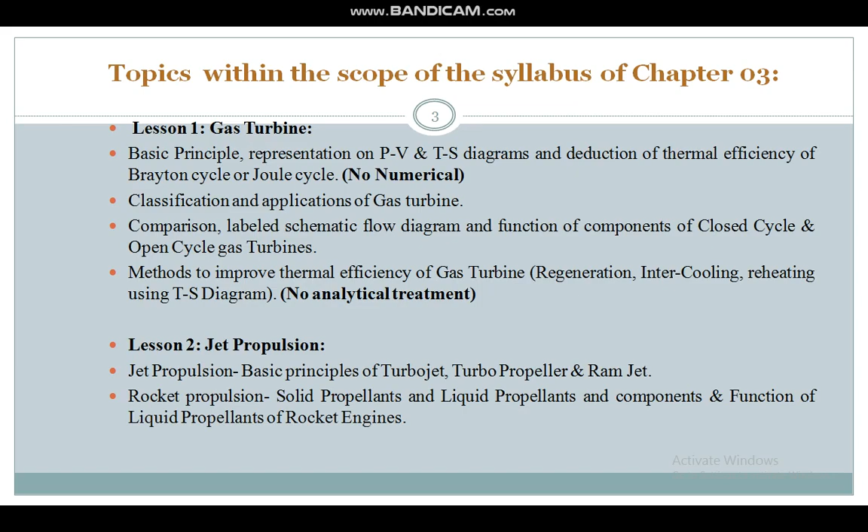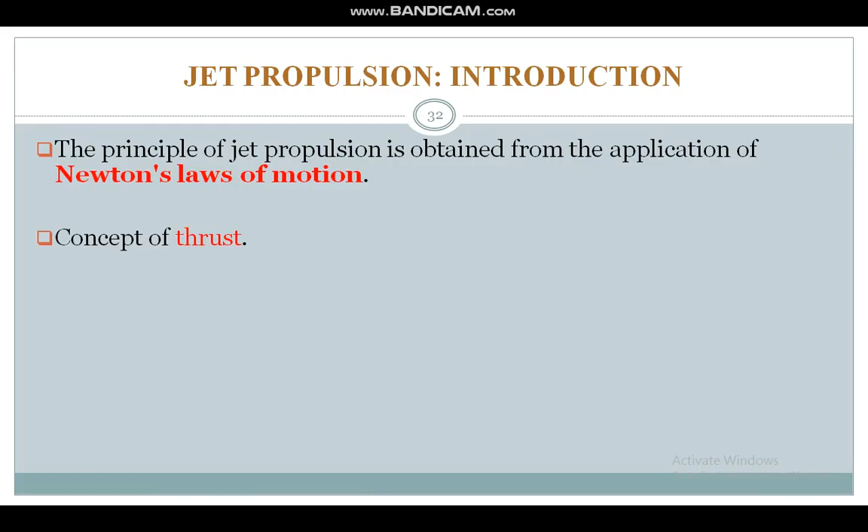In jet propulsion, the principle is obtained from the application of Newton's law of motion, the concept of thrust. When a fluid is accelerated, a force is applied on it. From Newton's law of motion, we know that an equal and opposite force is applied because of Newton's third law of reaction. This opposing force is a reaction force, and that is the thrust.

For jet propulsion, any type of fluid can be used, but mainly two types are useful. The first is highly compressed air admixed with liquid droplets, and the second is to use oxygen separately as an oxidizer to be mixed with the fuel and produce a jet of gas. This is mainly used in rocket propulsion, which we will discuss later.

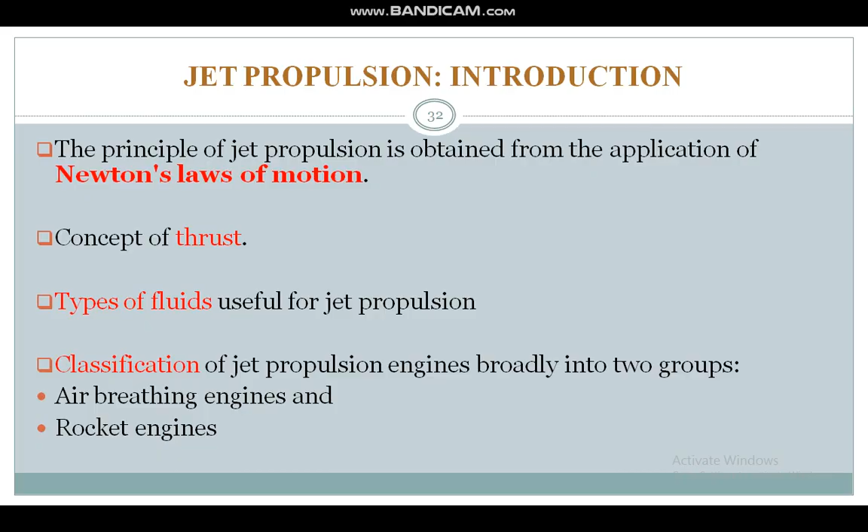Based on the type of fluids, jet propulsion engines can be classified into two groups: air breathing engines, where the oxygen is taken from the air, and rocket engines, where the oxygen is carried within the system. In rockets, the oxidizer, liquid oxygen, is carried.

Air breathing engines can further be classified into reciprocating propeller engines, and gas turbine engines.

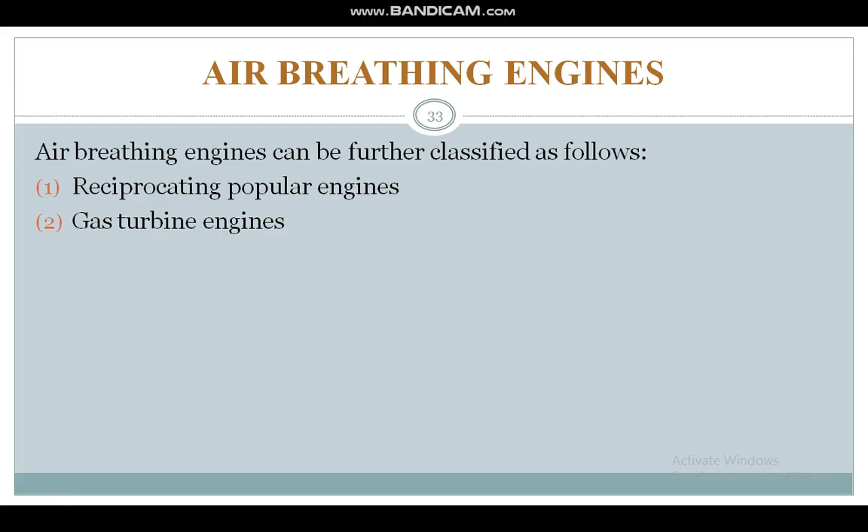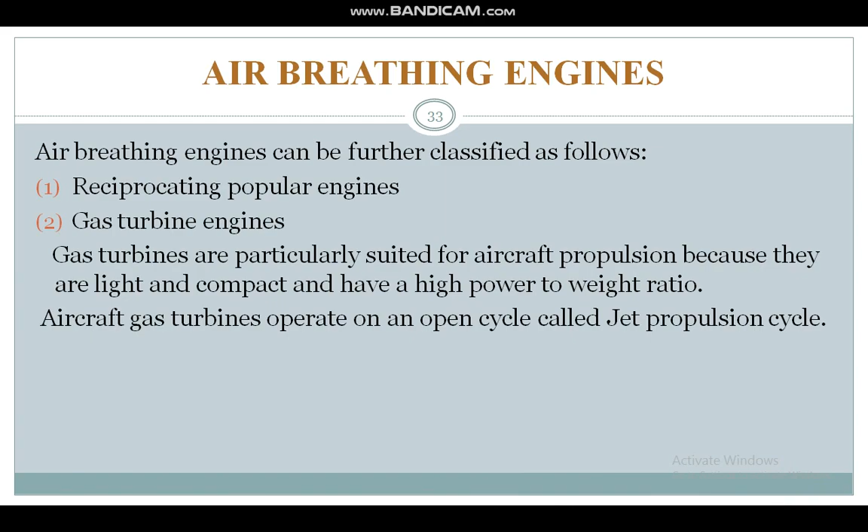Gas turbines are particularly suited for aircraft propulsion because they are light, compact, and have a high power to weight ratio. Aircraft gas turbines operate on an open cycle known as the jet propulsion cycle, and gas turbine engines can be classified into mainly five types: ramjet, pulse jet, turbojet, turboprop, and turbofan.

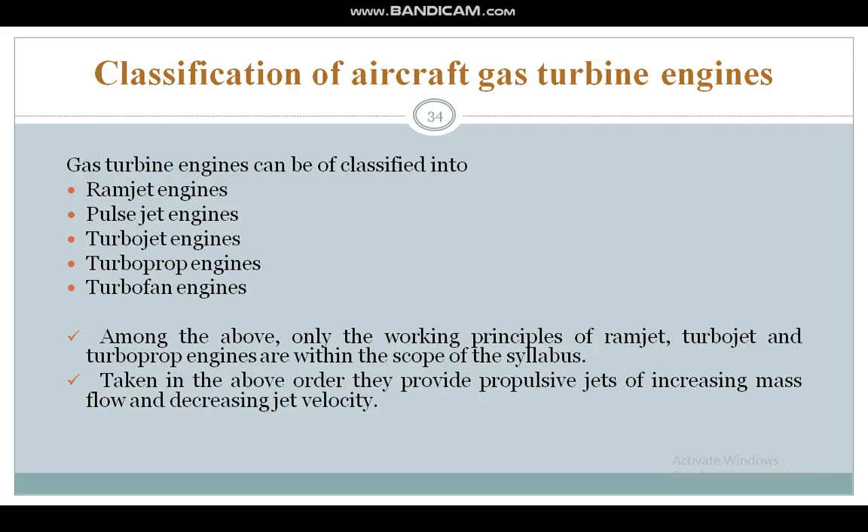In your syllabus we will discuss shortly about ramjet, turbojet, and turboprop engines, covering only their working principles, taken in that order. They provide propulsive jets of increasing mass flow and decreasing jet velocity - for ramjet we get the maximum jet velocity, and for turboprop we get the minimum jet velocity.

Turboprop engines are suitable for lower cruising speed at low altitude, and ramjet can be used for the highest cruising speed at the highest altitude.

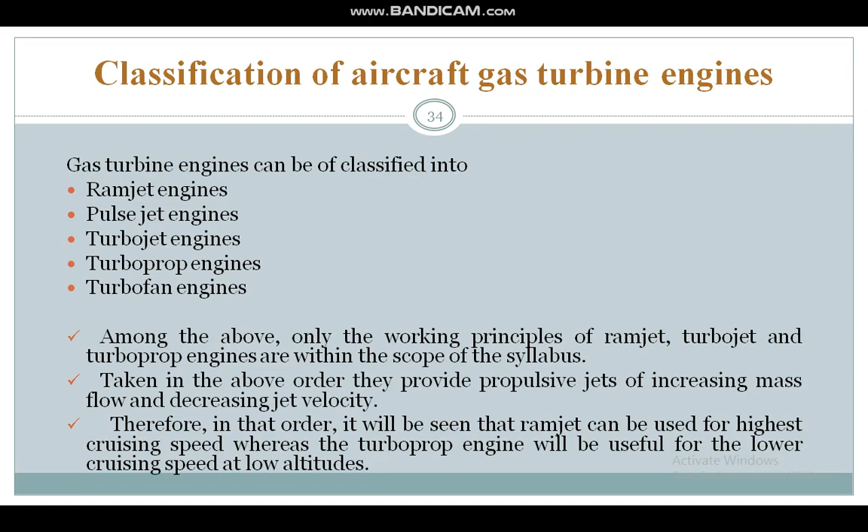Now let us start about the turbojet engine. This is the Heinkel He 178. It was the first aircraft in the world to be flown on a turbojet engine, in the year 1939. It was developed in Germany during World War II.

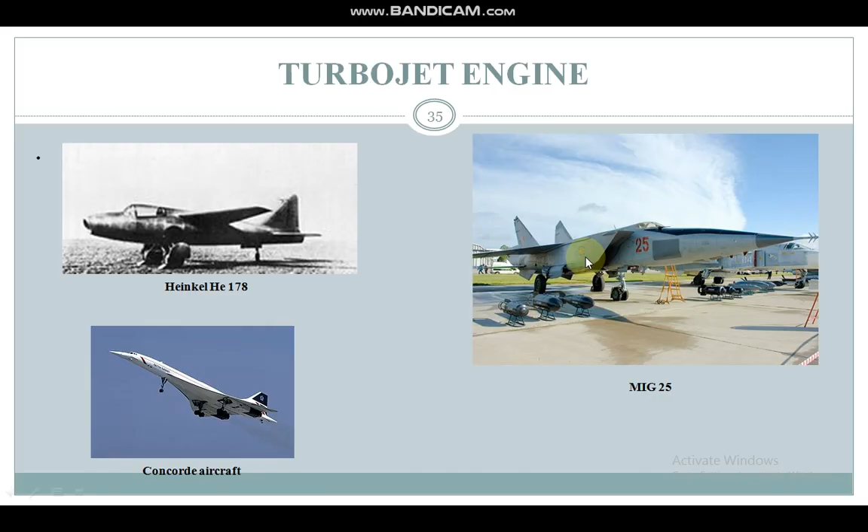Another two famous aircraft which flew on the turbojet engine were the Concorde, and the Soviet designed MiG-25, which was also used extensively in the Indian Air Force and retired a few years back. Now let us start with the turbojet engine. This is the basic components of the turbojet engine, and the TS diagram is shown here.

In the turbojet engine, the high velocity air first flows through a diffuser where it is decelerated, increasing its pressure - this is the diffuser part. Air is then compressed in the compressor, mixed with fuel in the combustion chamber where the mixture is burnt at constant pressure - there is a burner section - and then the high pressure, high temperature combustion gas partially expands in the turbine, producing enough power to drive the compressor and any auxiliary equipment.

This is the turbine part, and the exhaust gas drives the turbine. On the same shaft of the turbine the compressor is mounted, so when the turbine rotates, it also drives the compressor. So the driving power required for the compressor is taken from the turbine itself, right?

Finally, the gas expands in the nozzle to the ambient pressure and leaves the aircraft at high velocity. This is the nozzle part. So in the ideal case, the turbine work is assumed to be equal to the compressor work. The processes in the diffuser, compressor, turbine and nozzle are assumed to be reversible and adiabatic.

This is the turbine expansion line, 4 to 5. 5 to 6 is the nozzle. 6 to 1, there is the heat rejection.

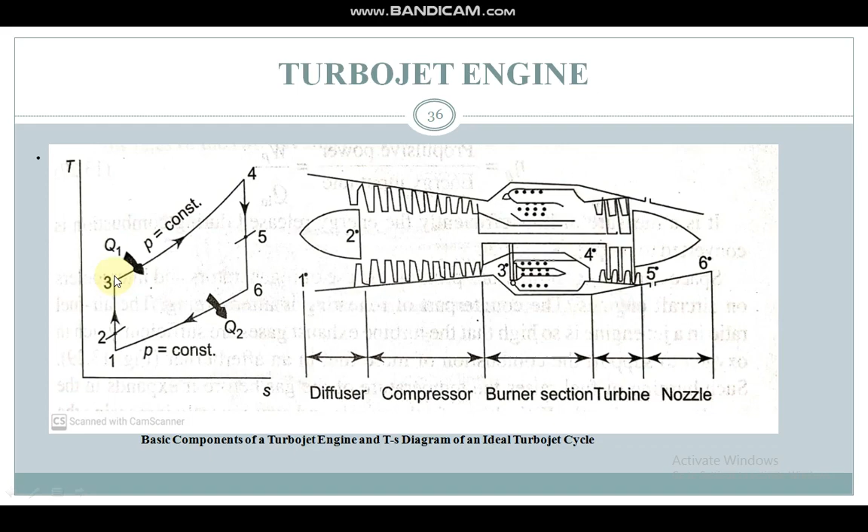This is the open cycle. If it is an open cycle, this part will be missing, it is simply thrown out to the atmosphere. 1 to 2 is the diffuser, 2 to 3 is the compressor, and 3 to 4 is the combustion chamber, right?

And another interesting part of the turbojet engine is the afterburner, which is used over here. The afterburner is used mainly in military aircraft. Space and weight limitations prohibit the use of regenerators and intercoolers on aircraft engines. The counterpart of reheating is afterburning.

The air-fuel ratio in the jet engine is so high that the turbine exhaust gases are sufficiently rich in oxygen to support the combustion of more fuel in the afterburner. That is, after the turbine, more fuel is sprayed in the afterburner, and because of the enriched oxygen even at the turbine exhaust, combustion takes place, and the burning of fuel raises the temperature of the gas before it expands in the nozzle. That is, the afterburner is placed before the nozzle and after the turbine, right?

This increases the kinetic energy change in the nozzle and consequently increases the thrust. In the air standard case, the combustion is replaced by constant pressure heat addition.

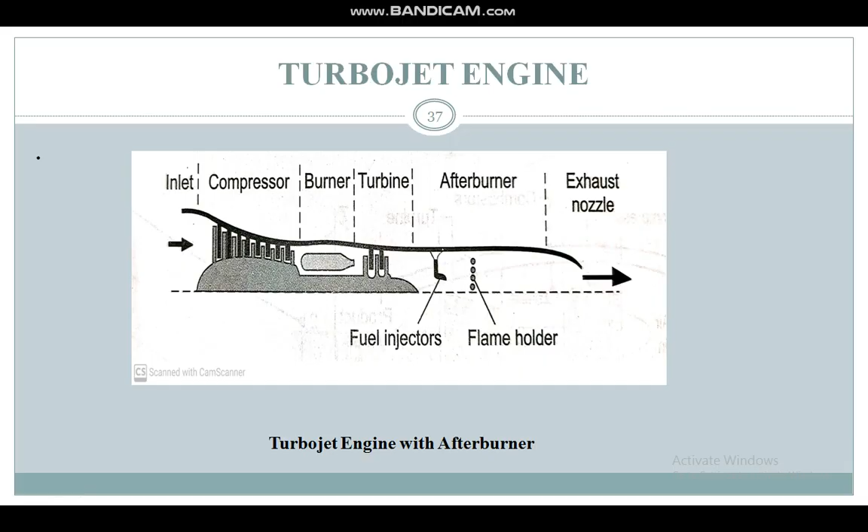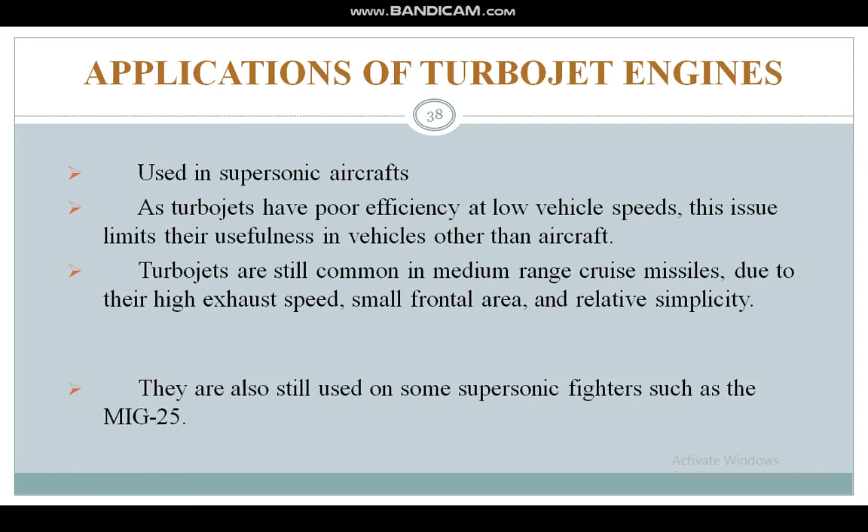So the applications of the turbojet engine: it is used in supersonic aircraft. As turbojets have poor efficiency at low vehicle speed, this issue limits their usefulness in vehicles other than aircraft. Turbojets are still common in medium range cruise missiles due to their high exhaust speed, small frontal area, and relative simplicity. They are also still used on some supersonic fighters such as the MiG-25.

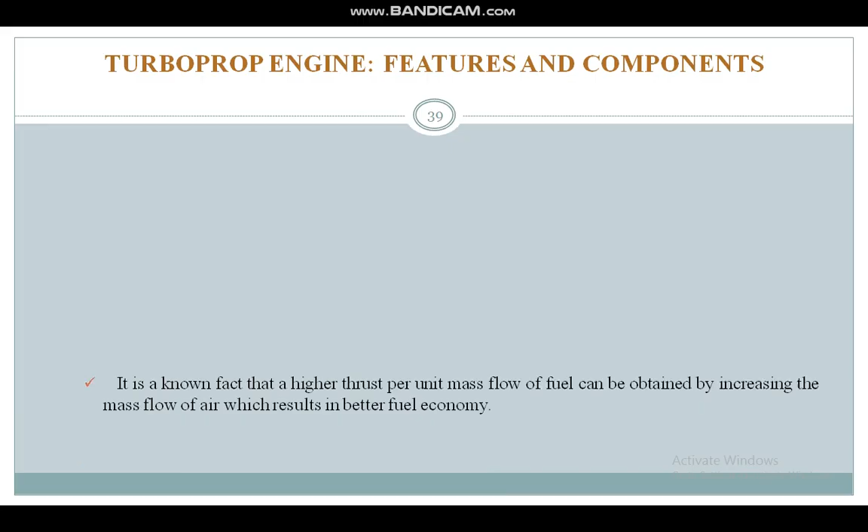Now for the turboprop, that is the short form of turbo propeller engine, the features: it is a known fact that high thrust per unit mass flow of fuel can be obtained by increasing the mass flow rate of air, and this is obtained by using the propeller.

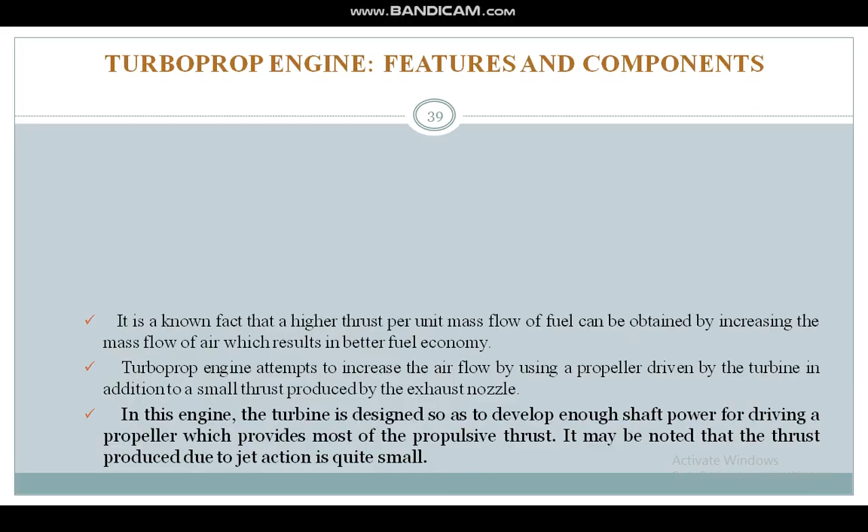Here the turbine is used to drive the propeller, which in turn generates most of the propulsive thrust. The thrust produced due to jet action in this case is quite small, and the thrust is mainly obtained from the propeller. In the same way as the previous one, there is the diffuser, then the compressor, then fuel is added.

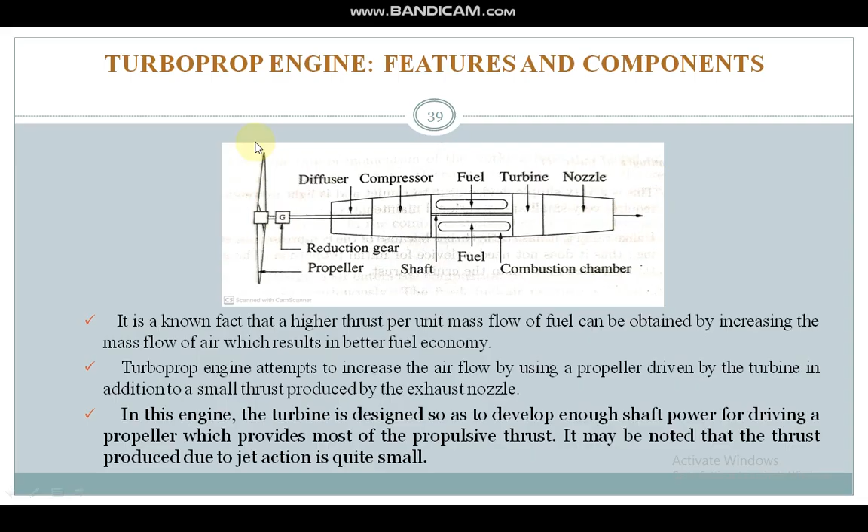Then it is expanded in the nozzle, and the turbine work obtained from the turbine is utilized by some gearing mechanism to drive the propeller. Depending on the propeller speed and diameter of the propeller blade, the thrust is obtained, and the rest of the exhaust is passed through the nozzle. But the thrust obtained from the nozzle part is much smaller than the thrust obtained from the propeller in case of the turboprop engine.

Advantages are mainly for low speed applications, they are important. These are the advantages.

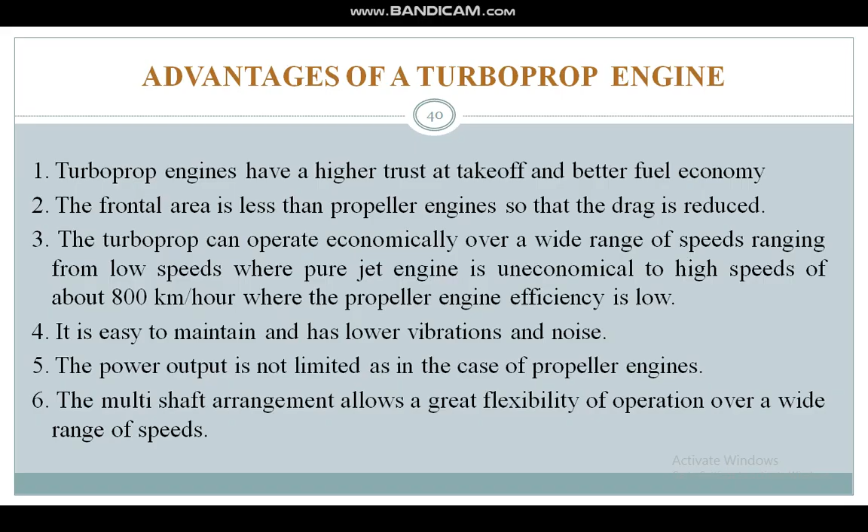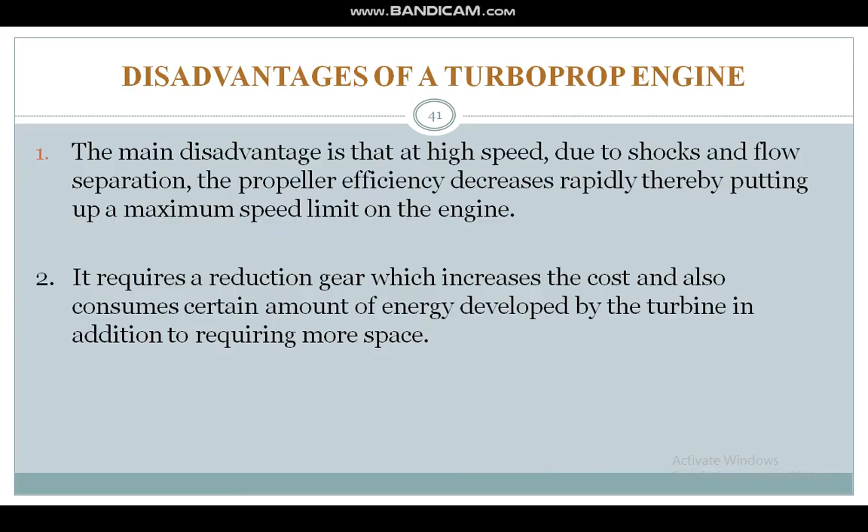In low speed applications they are very efficient, but as a disadvantage, at high speeds there are some problems due to high shocks. It requires a reduction gear for the propeller, which increases the cost, and it consumes a certain amount of energy developed by the turbine, in addition to requiring more space.

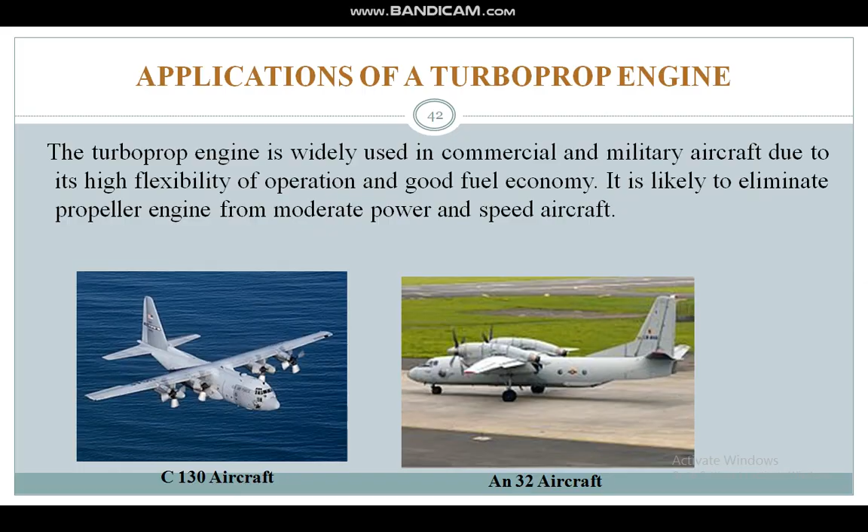These are some examples, and mainly it is used in transport aircraft. The next parts of the topic will be discussed in the next lecture. Thank you.